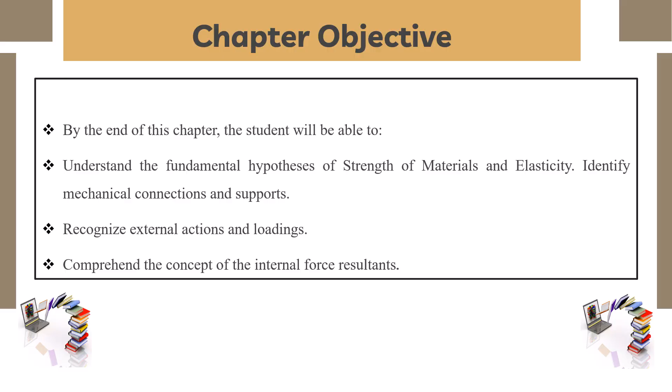By the end of this chapter, the student will be able to understand the fundamental hypotheses of the strength of materials and elasticity, and identify how mechanics of materials is applied to guarantee three essential design criteria: strength, rigidity, and stability across various civil engineering projects like buildings and bridges.

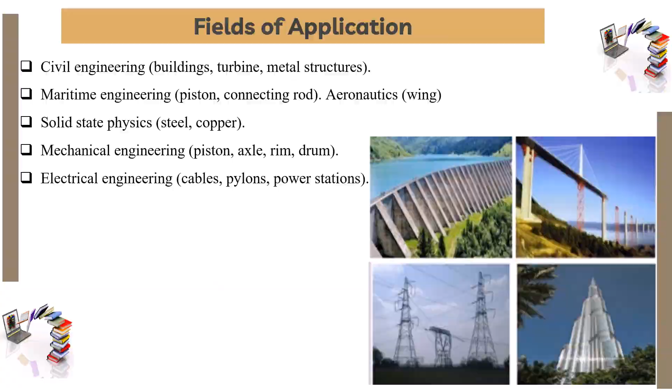Continuity. The material is continuous, meaning it has no cracks or cavities. Homogeneity. At every point, the material has the same chemical properties. Isotropy. The physical properties are the same at every point and in all directions. Elasticity. All bodies are perfectly elastic.

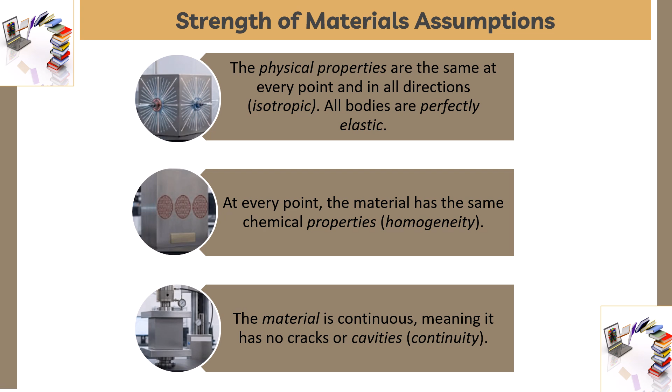Bernoulli hypothesis. A plane section remains plane after deformation. Superposition. The total effect caused by the action of several forces is equal to the sum of the effects due to the action of each force separately.

We start with the principle of linear elasticity. This hypothesis assumes that deformations are fully reversible and directly proportional to the applied stress, governed by Hooke's law, sigma equals E multiplied by epsilon. From an engineering perspective, this means that as soon as external loads are removed, the structural member returns completely to its original undeformed shape without any permanent plastic deformation.

Then we move from constitutive material behavior to structural kinematics. We apply the Bernoulli hypothesis, also known as the assumption that a plane section remains plane. This kinematic rule dictates that cross-sections originally plane and perpendicular to the neutral axis stay plane and perpendicular to it even after bending. In terms of engineering impact, this assumption directly simplifies beam bending theory by establishing a linear distribution of axial strain across the depth of the cross-section.

Finally, combining linear material behavior with small deformations allows us to leverage the principle of superposition. This principle states that the total combined effect of multiple external loads acting together is equal to the algebraic sum of the effects produced by each load acting individually.

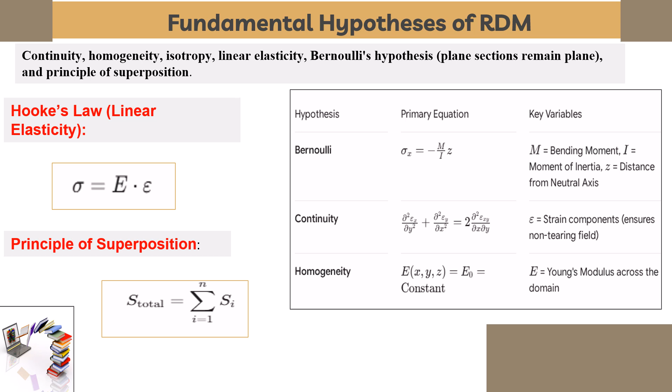Practically speaking, this gives us a powerful analytic advantage. Instead of solving a complex multi-load scenario all at once, we can break down a complex load combination into simple components, analyze each individually, and simply sum the results.

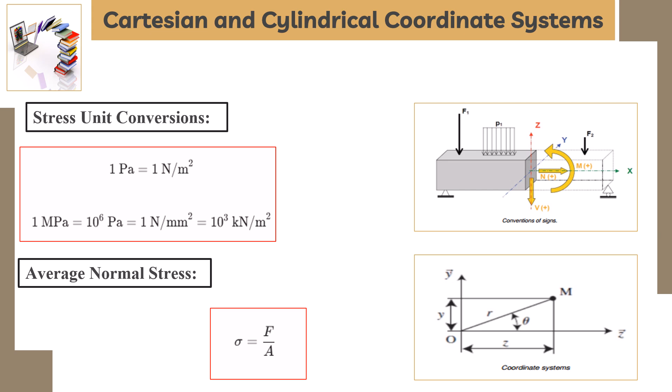Cartesian and cylindrical coordinate systems. We model structural elements along a longitudinal axis X and transversal axes Y and Z. Standard units strictly express stresses in megapascals. Structural solid classification in Strength of Materials 1. Our primary focus is on 1D line elements such as beams and bars, where the longitudinal dimension is significantly greater than the cross-sectional dimension.

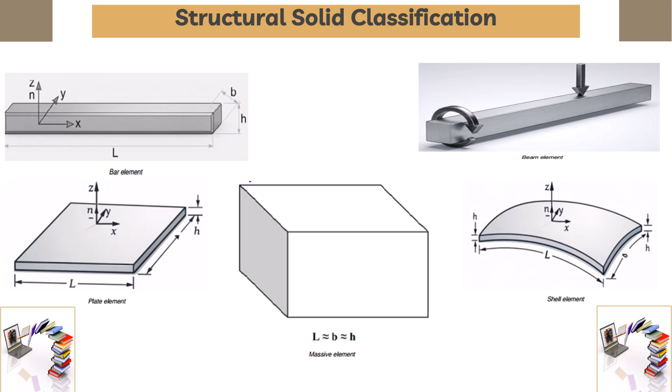To understand how structures handle loads, engineers analyze their external connections, which enforce kinematic restrictions by exerting reaction forces that act as unknowns in static calculations. In 2D planar systems, these connections are categorized into three basic types according to the degrees of freedom they restrict.

The first, simple support. This boundary condition prevents translation along a single axis, typically perpendicular to the contact surface, leaving the remaining movement and rotation free. Because only one motion is restricted, it generates one unknown reaction force.

Second, double support. This type restricts two degrees of freedom by preventing translation along both orthogonal axes, X and Z, while still allowing free rotation. Consequently, it develops two unknown reaction forces.

Last, triple support. Here three degrees of freedom are restricted, preventing horizontal translation, vertical translation, and rotational motion entirely. This complete restriction produces three unknown reactions: two force components and one reactive moment.

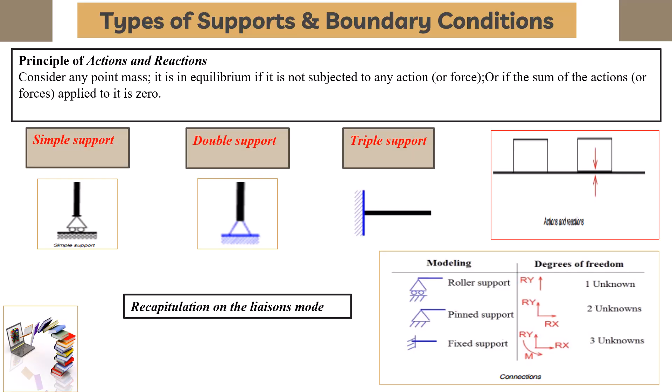Structural systems are categorized by their degree of static indeterminacy H, which measures the difference between unknown reactions Q and equilibrium equations P, to reveal the number of redundant supports in a system. The first, hypostatic systems, H less than 0. In this scenario, the number of unknown support reactions Q is strictly less than the three static equilibrium equations, P equal 3, because there is insufficient support to maintain equilibrium. This system cannot safely support external loads.

Second, isostatic systems, H equals 0. Here the number of unknown reactions, Q equal 3, exactly balances the number of equilibrium equations, P equal 3, allowing us to solve for all internal actions and external reactions using static laws.

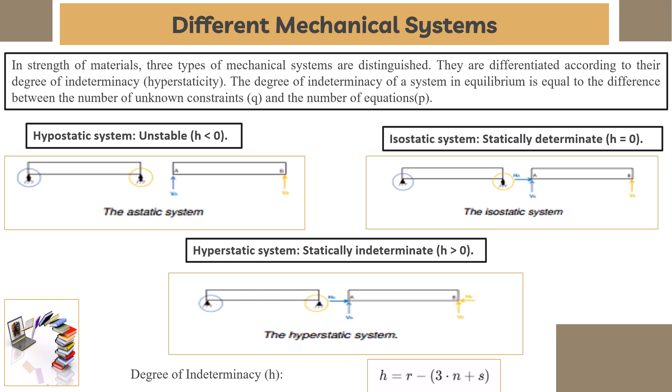Finally, hyperstatic systems, H greater than 0. In this case, the number of unknown reactions, Q greater than or equal to 4, exceeds the available equilibrium equations, P equal 3. To solve for these unknown reactions, static equilibrium equations alone are no longer sufficient, requiring us to incorporate material deformation and compatibility conditions. Structural resistance depends heavily on the section geometry.

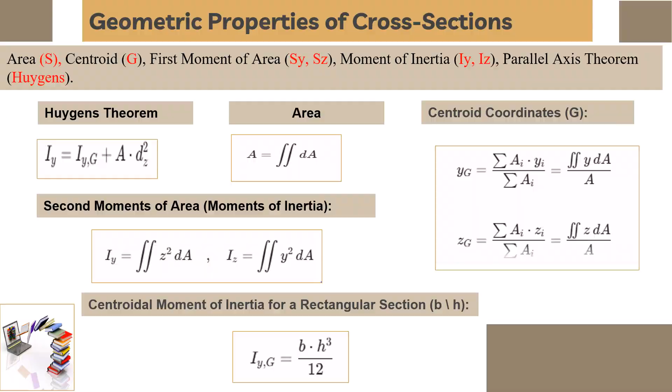We evaluate the centroid G, moments of inertia, and apply Huygens parallel axis theorem for composite sections. We start with a shift from statics to deformability. Unlike general statics, which assumes completely rigid bodies to determine external reactions, strength of materials allows for material deformation to evaluate internal stresses, strain and structural behavior under applied loads.

Then we move to stability. Students learn to classify structural systems as hypostatic, isostatic, or hyperstatic depending on their degrees of freedom and boundary conditions, laying the groundwork for solving both simple and complex structures.

After that, we move to cross-section optimization. Structural resistance to bending, shear, axial loads, and torsion depends heavily on the geometric properties of the cross-section, such as the centroid, static moment, second moments of area, and radius of gyration.